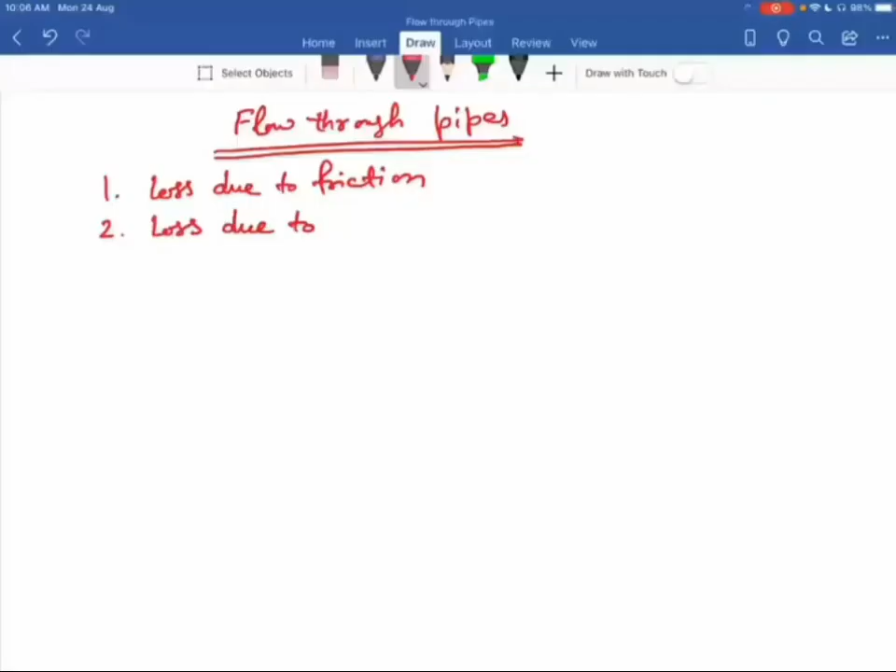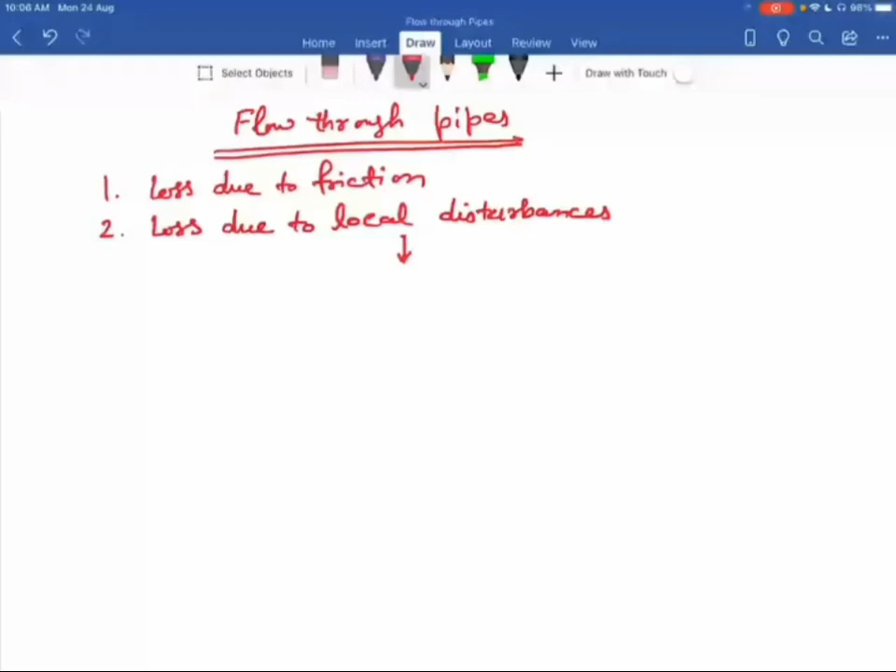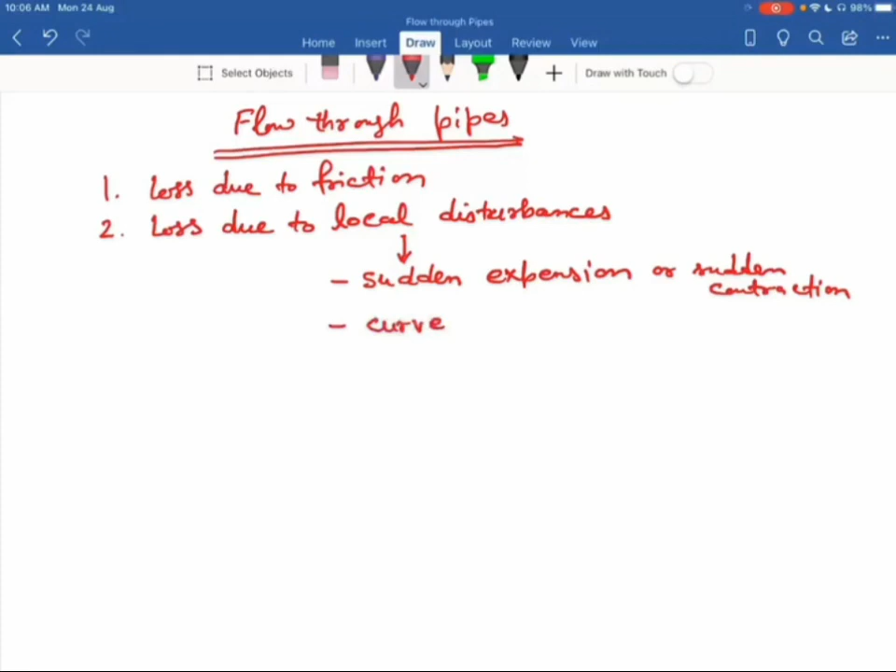When we experience various types of flow through pipes, we see various losses. Those losses are, number one, loss due to friction, and second, loss due to local disturbances. This loss due to local disturbances may be due to sudden expansion, or sudden contraction in the pipe. It may be due to some curve or bend in the pipe, or due to entrance and exit in the pipe.

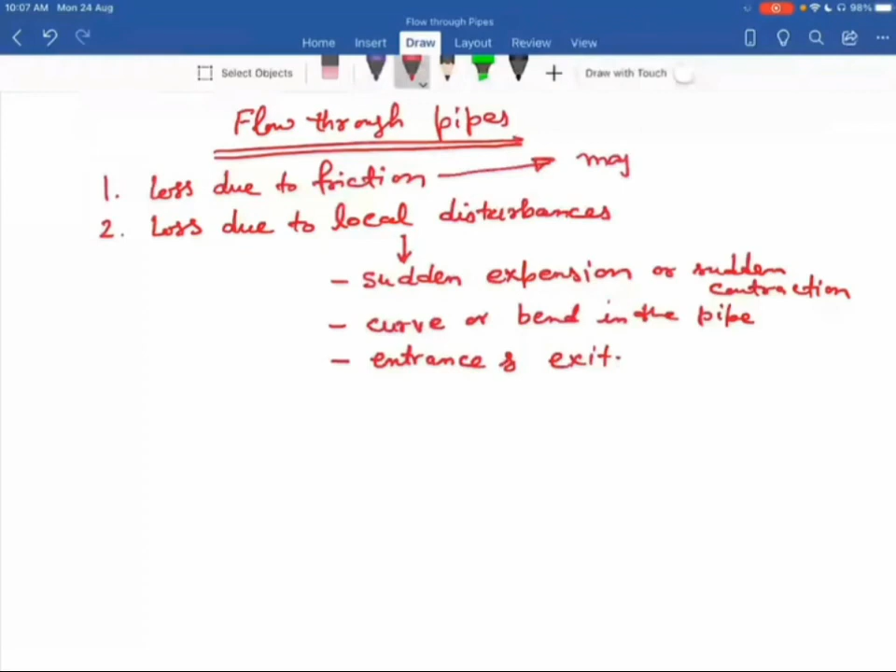Now the loss due to friction we call the major loss or major pipe loss, and the losses due to these local disturbances we call minor pipe loss. All these losses we measure in terms of pressure drop when some fluid is flowing from one section to another.

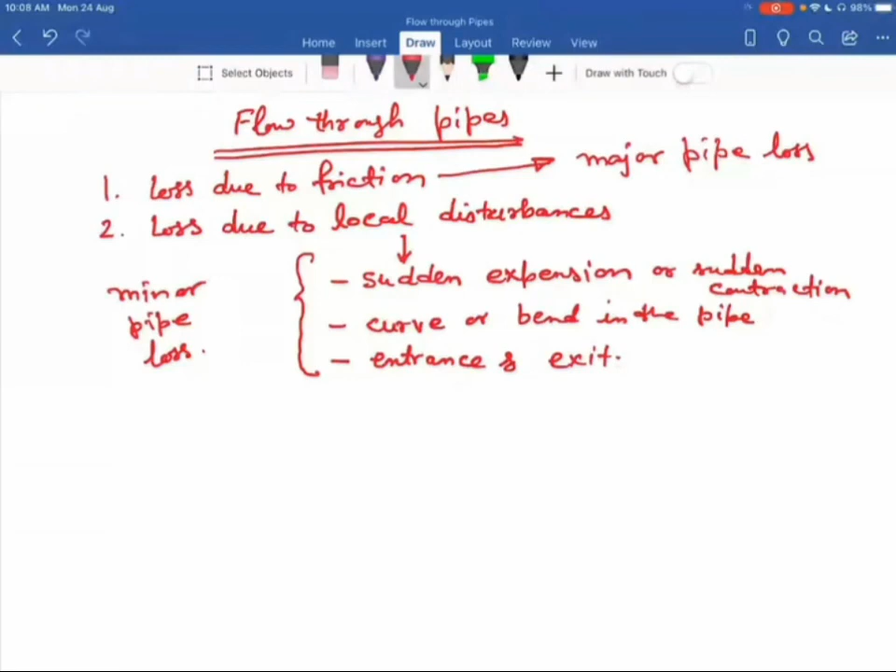Now say we have this pipe, and this is the direction of flow. This is our section 1, this is our section 2. When fluid flows from section 1 to section 2, there is some pressure drop due to friction in the pipe, and that pressure drop we call the losses. If this pressure drop is due to friction, we call it major pipe loss, and if due to sudden contraction, sudden expansion, curve, bend, entrance and exit, we call it minor pipe loss.

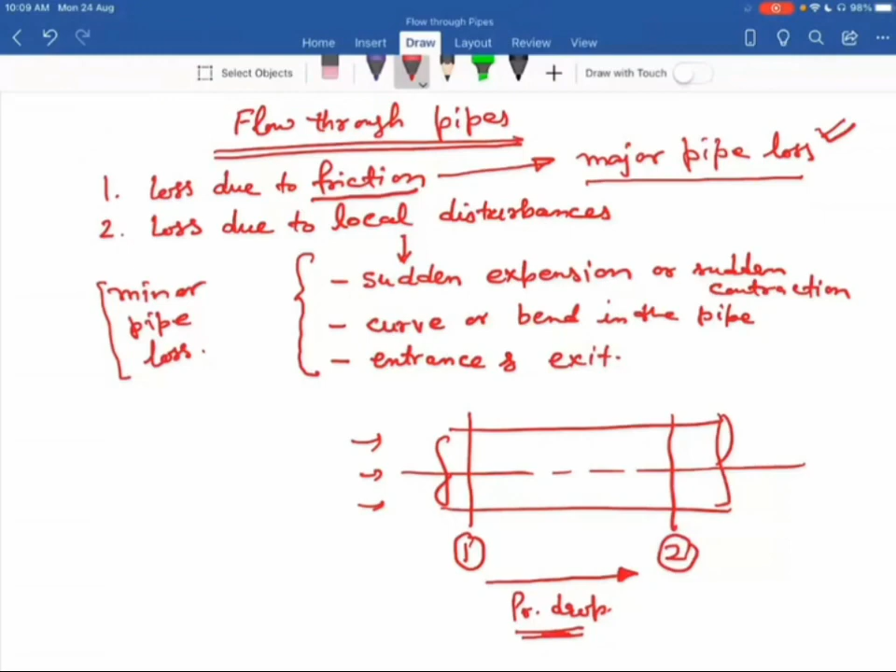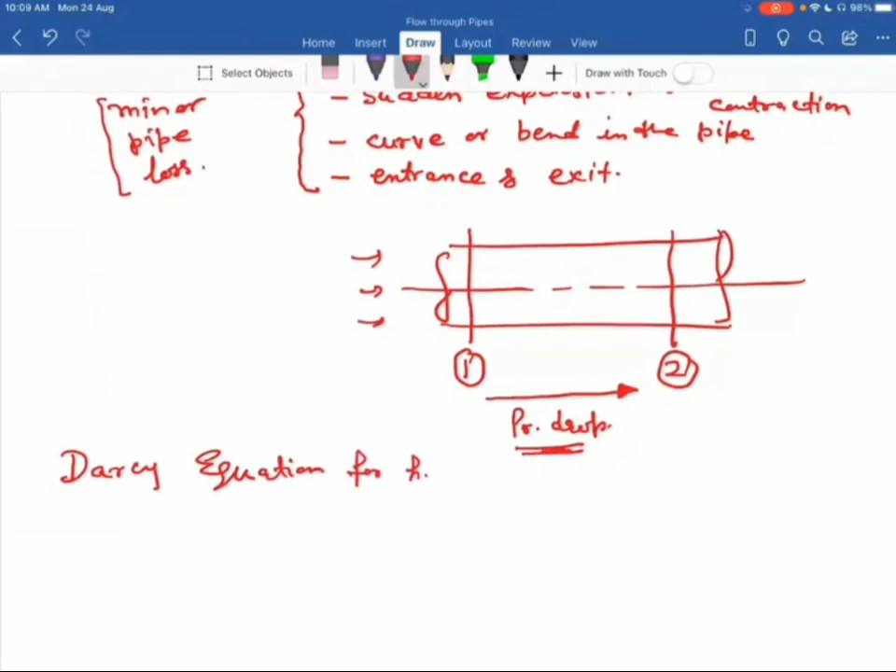So now we have to see the various formulas for these losses. First we see the formula for measuring the major pipe loss, that is the loss due to friction. The first formula for measuring the major loss is the Darcy equation, that is the Darcy equation for measuring head loss due to friction.

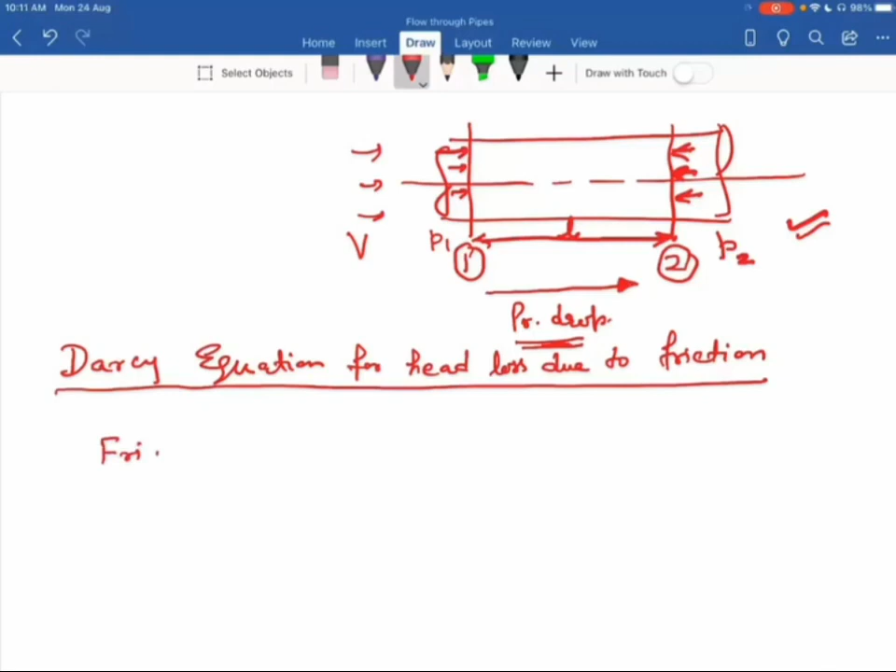For writing this equation, again we consider this pipe. Say in this pipe a uniform flow of fluid is flowing with velocity capital V. We consider two sections, section 1 and section 2, and the length between these two sections is L. The pressure intensity at section 1 is P1, at section 2 it is P2. The change from P1 to P2 is due to friction. When this liquid flows from section 1 to 2, the fluid experiences a frictional resistance force.

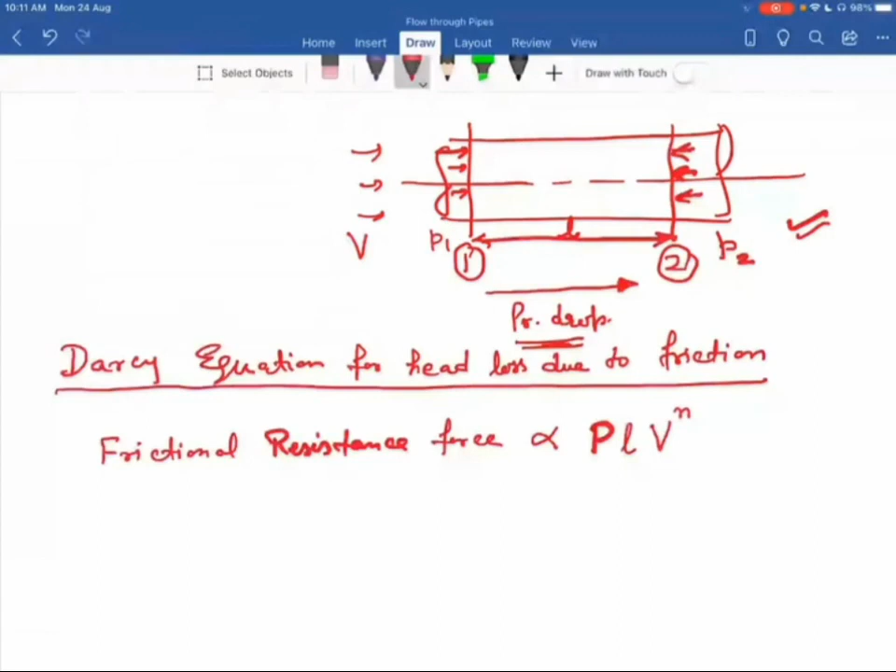On the basis of experiment, we see that this force is proportional to capital P, proportional to L, and proportional to V raised to the power N. Here P is the wetted perimeter of the pipe, meaning the perimeter of the pipe which is in contact with the liquid or fluid. L is the length of the pipe, and V is the average velocity of flow, that is the uniform velocity across the section.

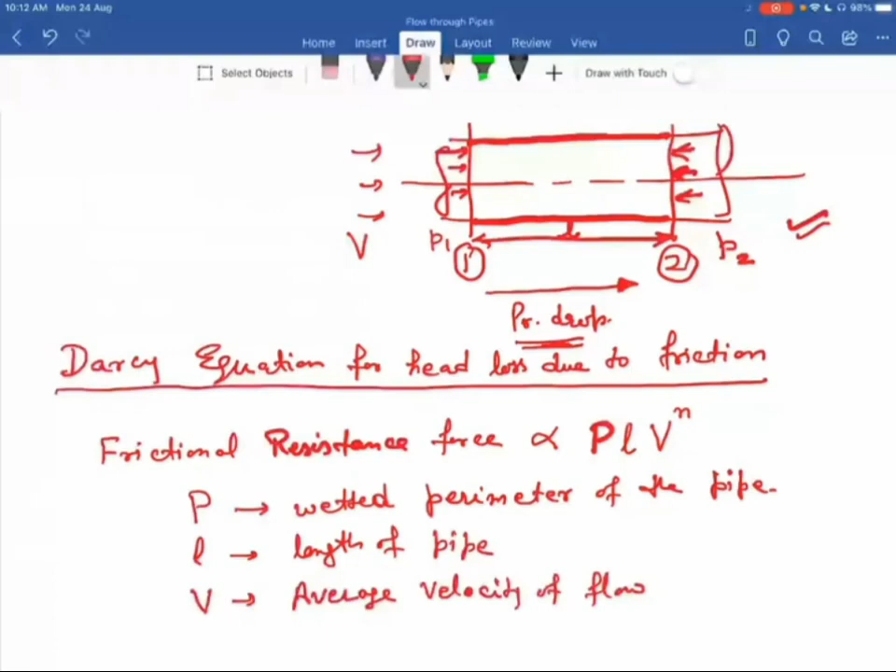And N is an index having some numeric value. The value of N depends on the material of the pipe, on the nature of the pipe surface. Nature of pipe surface means the roughness of the pipe; the pipe may be smooth or rougher. Depending upon that, we have the value of N.

Pipes which are available in the market we call commercial pipes. In practical cases, when liquid flows through those pipes, we consider the flow to be turbulent. So for commercial pipes with turbulent flow, the value of N is approximately 2. All the pipes available in our market, when used practically, have turbulent flow, so the value of N is approximately 2.

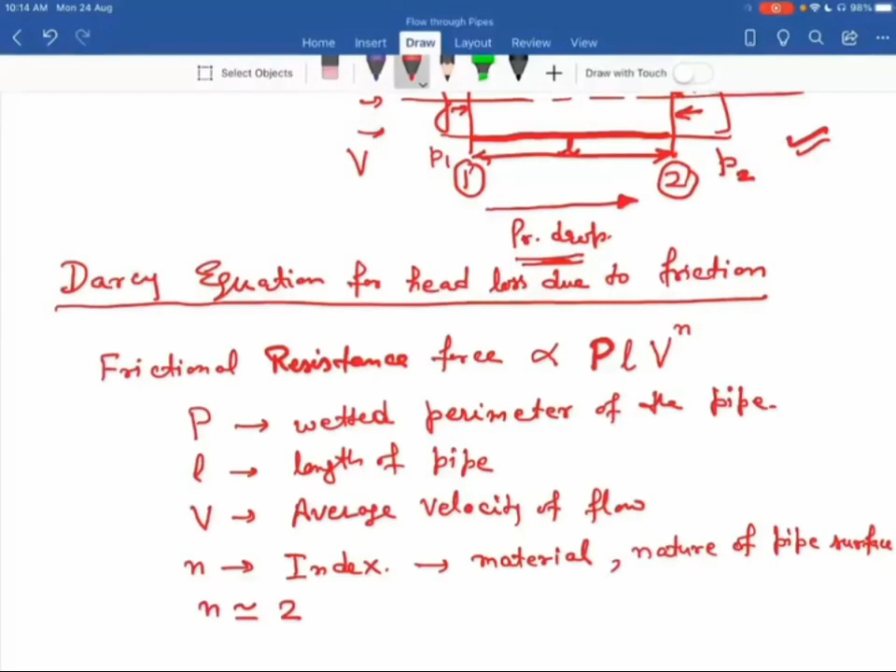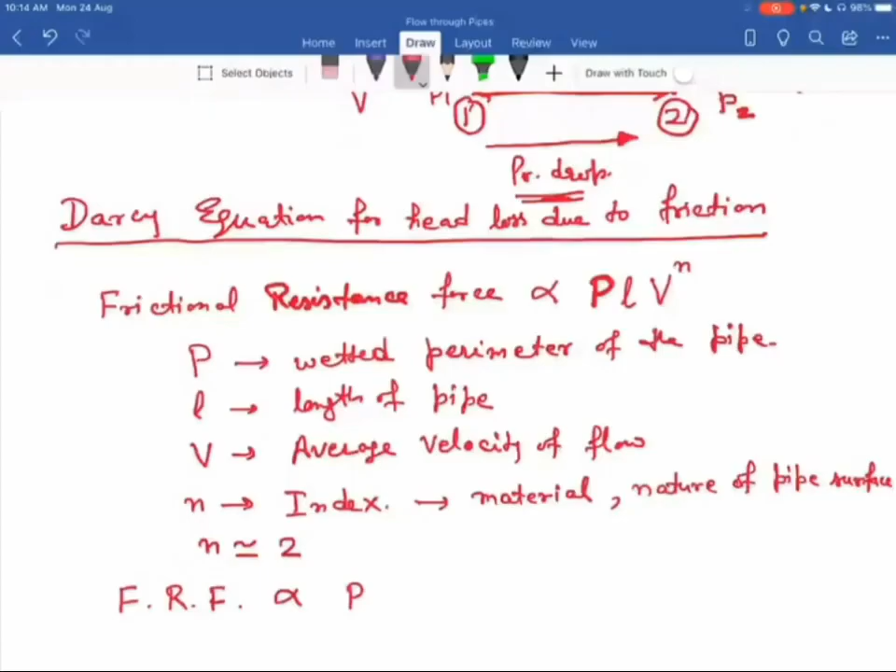Therefore we can write the frictional resistance force as proportional to P L V squared for commercial pipes. If we replace the proportionality sign with an equality sign, we add a constant of proportionality, so it is F dash P L V squared. F dash is a constant whose value depends upon the density of pipe material and the nature of the pipe surface. This is our equation number 1, which gives us the frictional resistance force. Now, if we see this pipe again, from section 1 to section 2 there is a drop in pressure from P1 to P2.

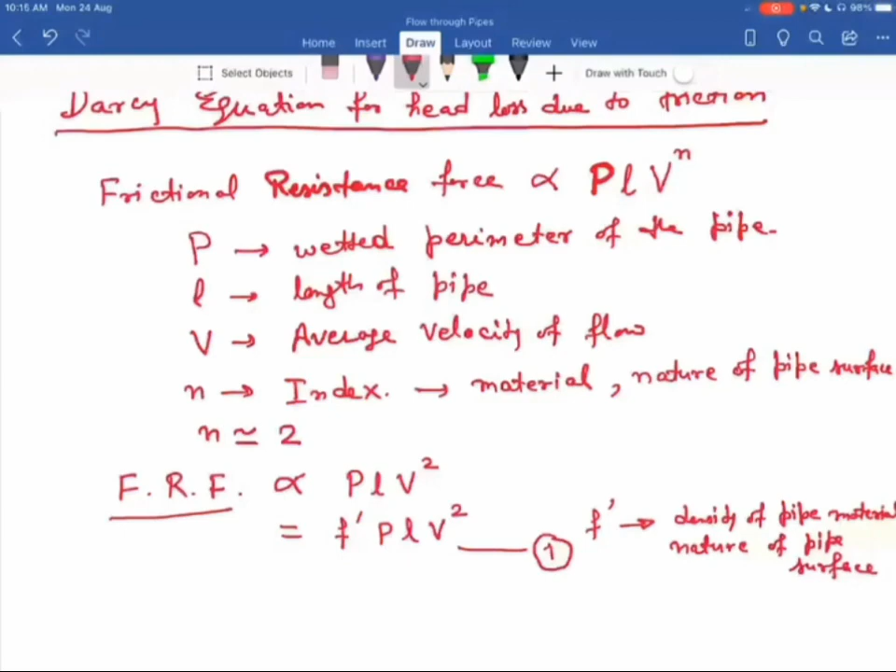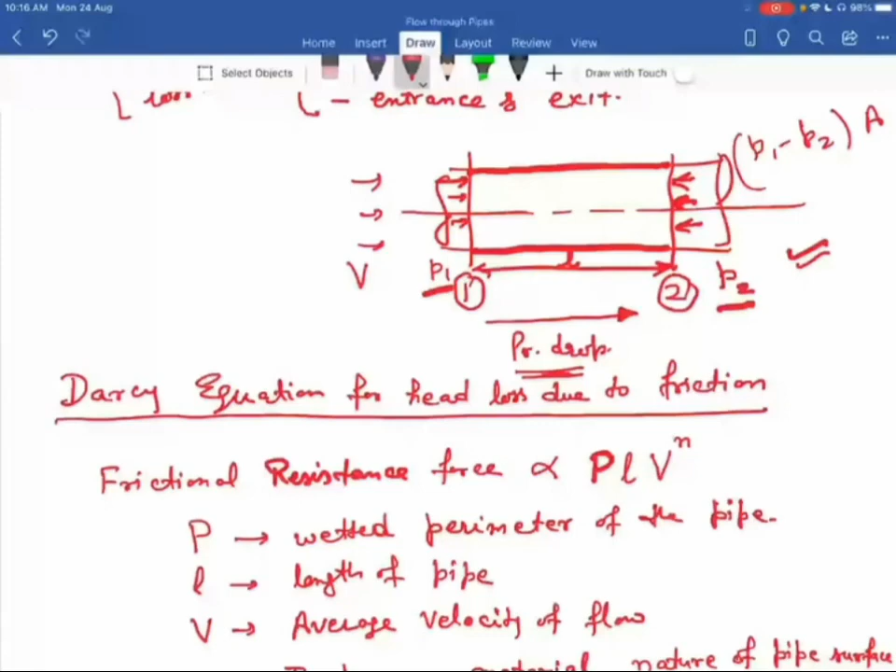Okay. Now, if I write this pressure drop, that's P1 minus P2, in terms of force, I have to multiply this by area. So the net force due to this pressure drop from section 1 to section 2 we can write as P1 minus P2 into the area of the pipe. So under equilibrium condition, this is our equation number 2.

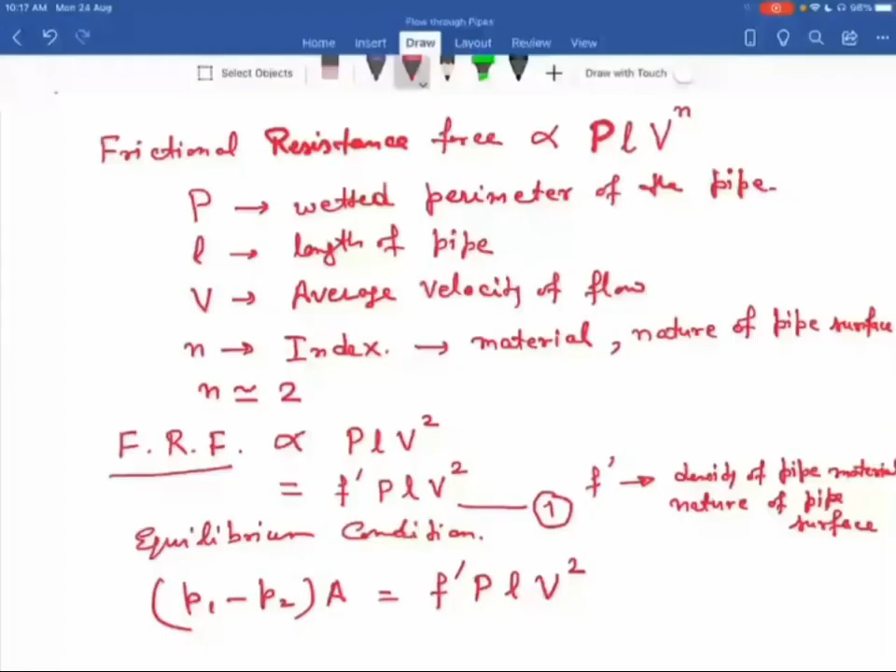Under equilibrium condition, we can write P1 minus P2 into A should be equal to F dash PL V square. Now we divide both sides by specific weight of liquid, small w. Then take A on the other side, divide by A.

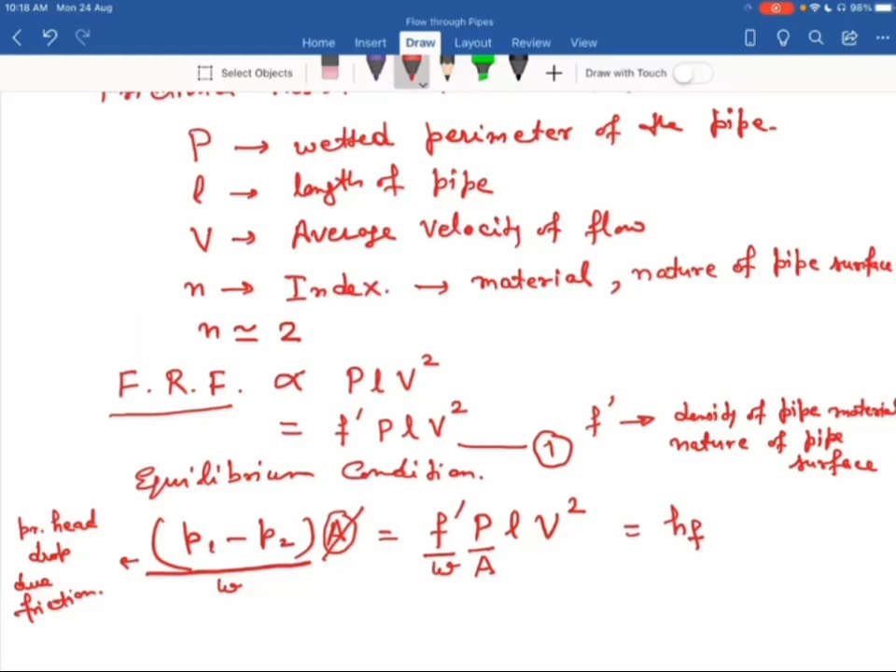Now on the left hand side, we have P1 minus P2 by W, which is the pressure head drop due to friction from section 1 to section 2. We can write this as HF. So HF is pressure head drop due to friction, equal to F dash by W into P by A.

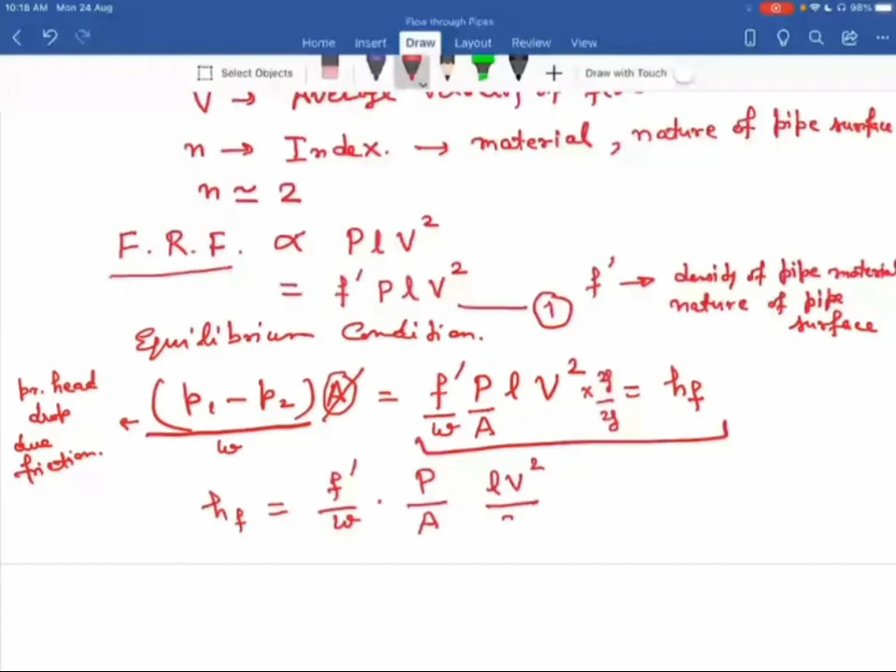Now I do one more thing. I multiply this term by 2G and divide by 2G, so I write it as LV square divided by 2G. Now further, we have one ratio A to P. Capital A is the cross-sectional area of the pipe, and capital P is the wetted perimeter of the pipe. This ratio I denote by Ym, and I call it hydraulic mean depth.

Now I rearrange the terms: HF equals 2G F dash by W into L upon Ym into V square divided by 2G. HF is the head loss, so its unit is meter. Similarly on this side, V square by 2G is again in meter. So this is one constant, and the remaining term has unit meter, same as that of HF.

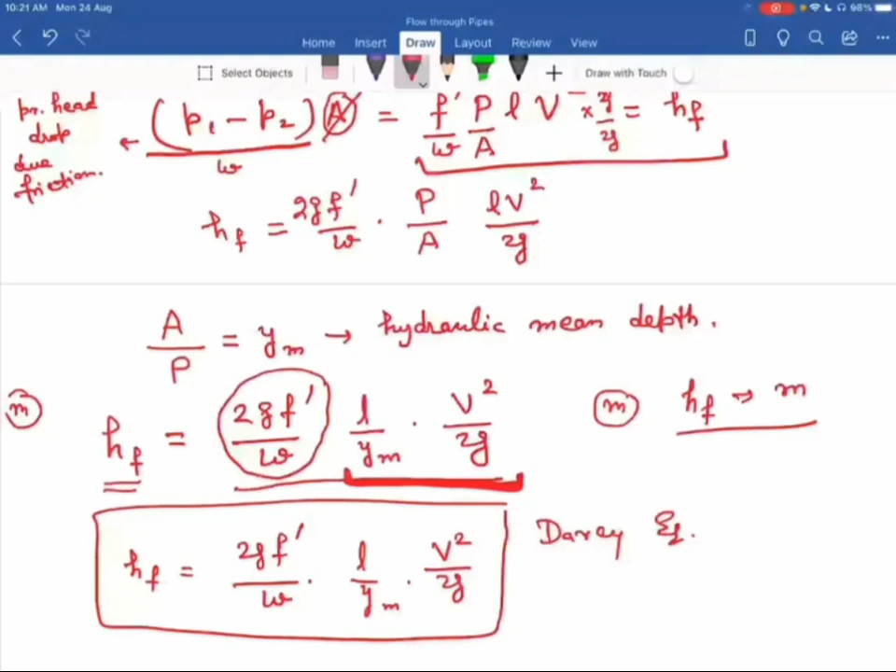So now we have HF equal to 2G F dash by W into L upon Ym into V square upon 2G. We call this Darcy's equation, used for determining the head loss due to friction. Now take the special case of a circular pipe. The perimeter is 2 pi r, or pi d. So hydraulic mean depth A upon P is pi by 4 d square divided by pi d, which comes out to be d by 4.

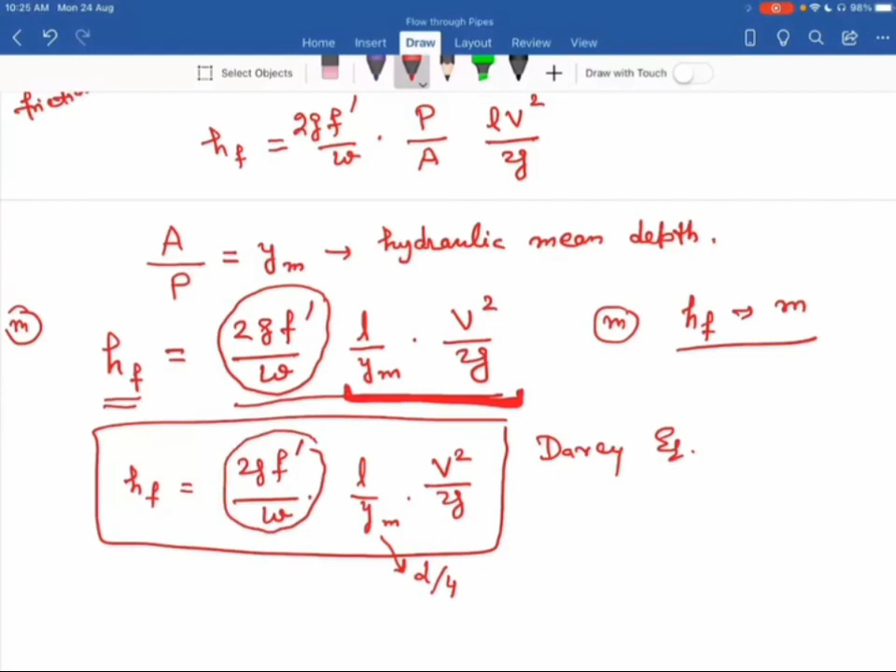So in Darcy's equation, use Ym as d by 4, and this total constant I write as F. So HF becomes 4FL V square divided by 2GD.

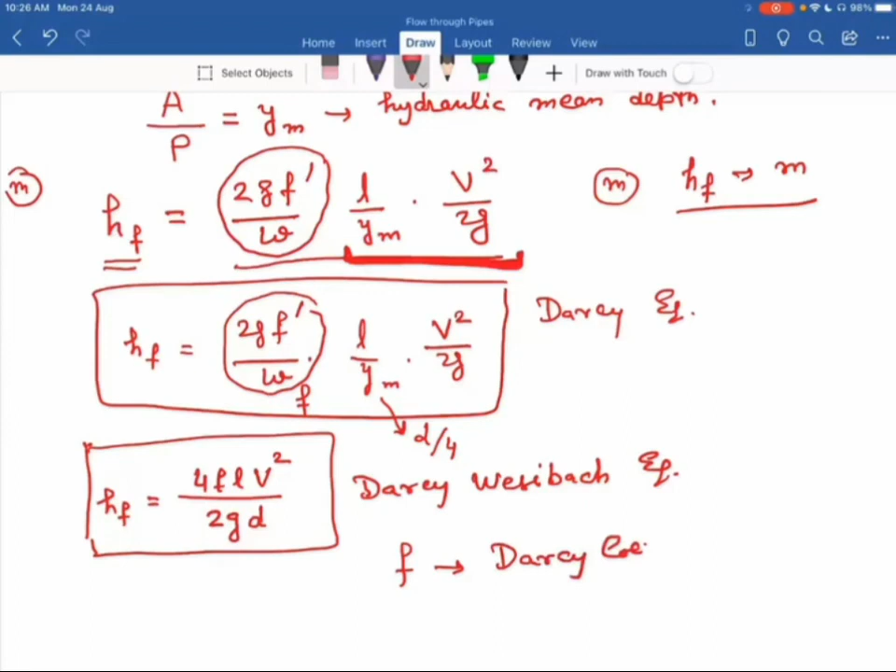This is called the Darcy-Weisbach equation: HF equals 4FL V square divided by 2GD. In this equation, F is called the Darcy coefficient of friction, and the combined term 4F is called the friction factor.

You have to keep this in mind when solving numericals. Either the Darcy coefficient of friction or the friction factor is given. When friction factor is given, that is 4F; when Darcy coefficient of friction is given, that is simply F.

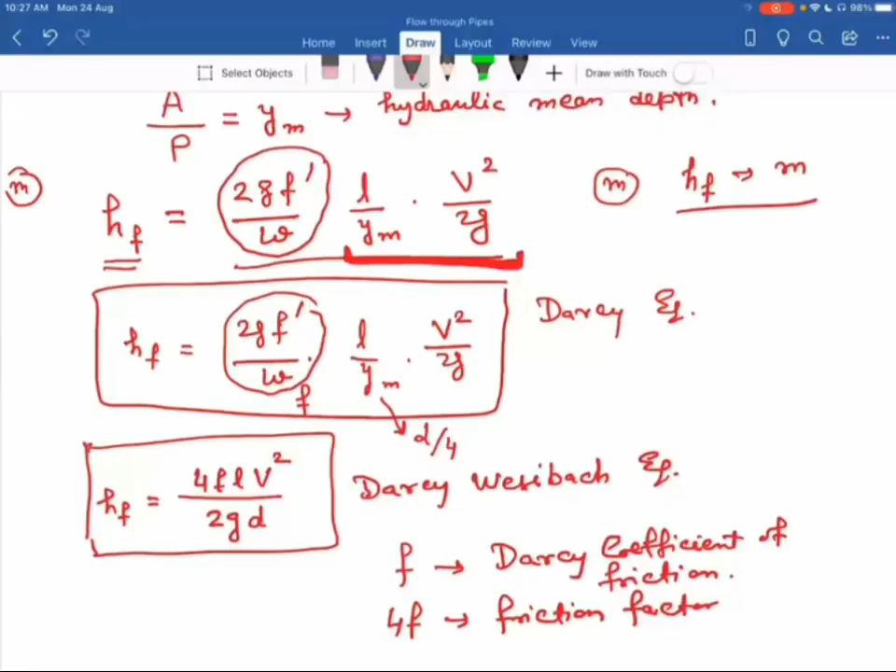Now the discharge Q we can write as A into V. For a circular pipe, that is pi by 4 d square into V. From here, V square comes out to be 16 Q square divided by pi square d raised to power 4. Replace V square in this term by this.

Then HF is approximately equal to FLQ square divided by 3 d raised to power 5. Whatever constant value comes is approximately 1 by 3. So in terms of discharge, you can use this formula. If velocity is given, you can also use the other formula.

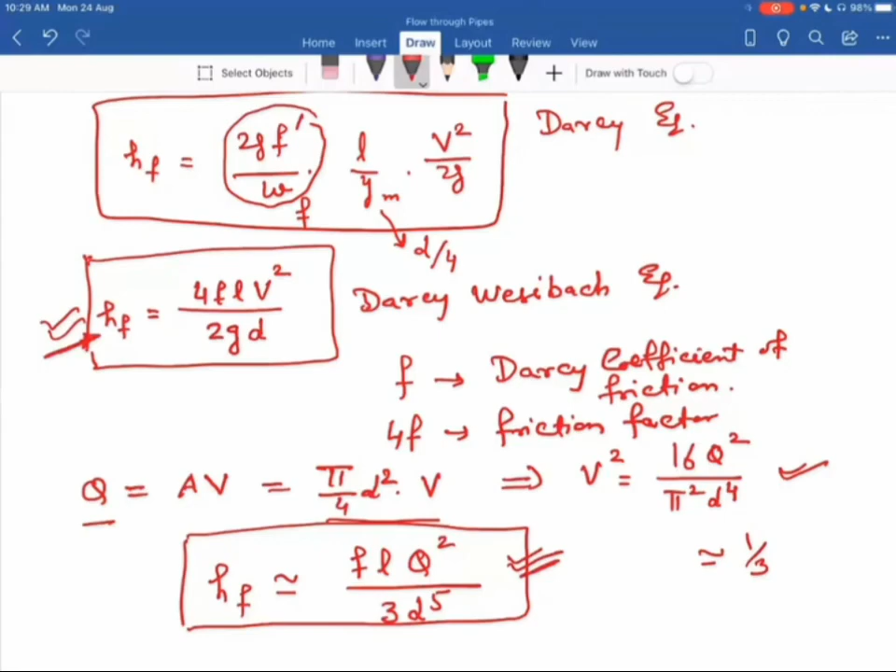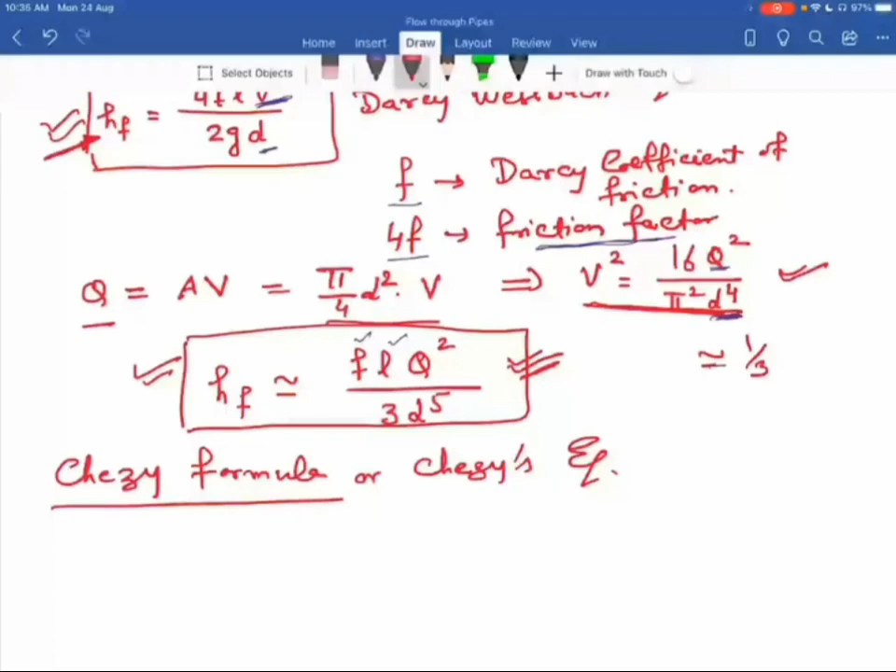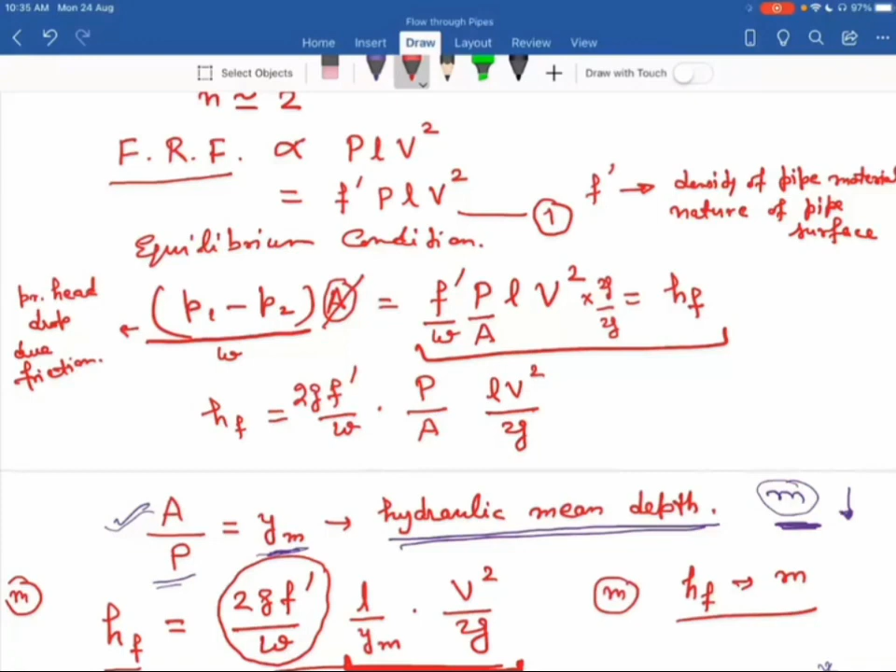So I have one more formula for determining the frictional loss that I call Chezy's formula or Chezy's equation. This we can also use to determine the frictional loss. For its derivation I start from this equation where I equate 1 with 2. So equation 1, f' P L V square, this one. And equation 2 is P1 minus P2 into A.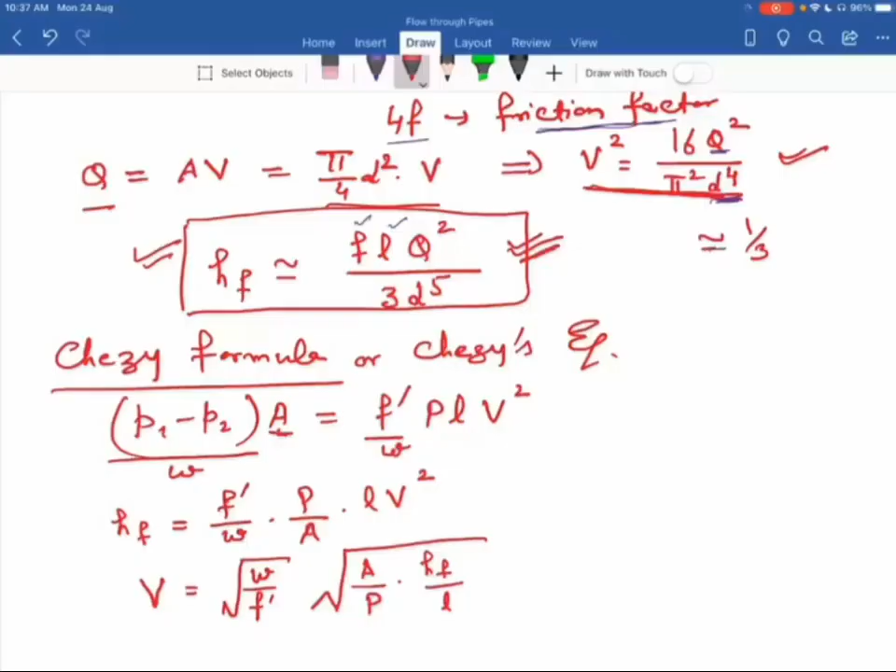So I write it again: P1 minus P2 into A equal to f' P L V square. Again I divide both sides by W. So I write hf equal to f' by W into, now take A on the other side, P by A into L V square. So from this equation I write V. This V comes out to be under root W by f', then A by P into hf divided by L under root. So I rearrange the terms and find out the value of V.

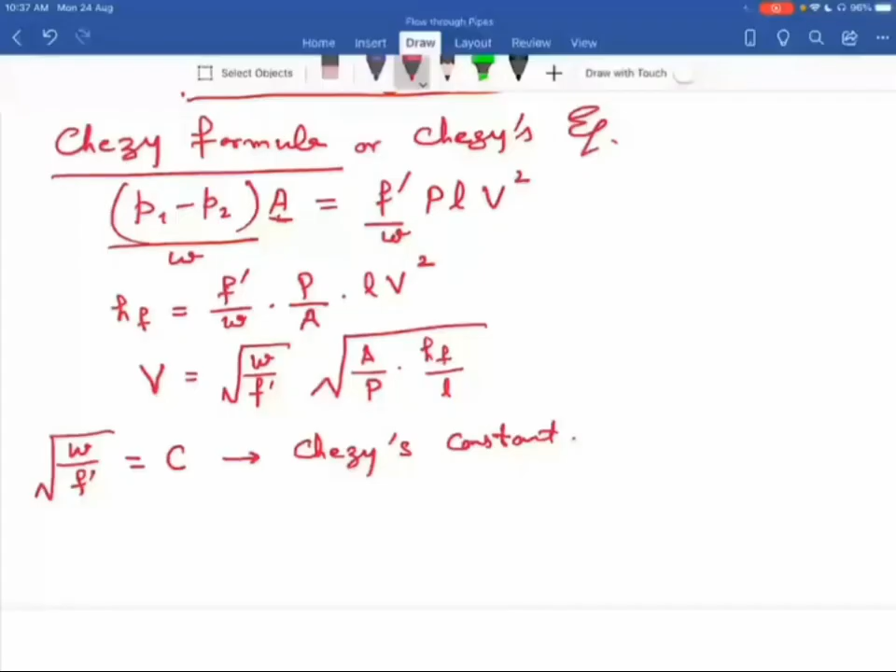Now, in this relation, W divided by f', this constant under root, I write it as capital C, and this is called Chezy's constant. A upon P, that is m, hydraulic mean depth. And then hf divided by L is head loss due to friction per unit length, so I denote it by i. So now the formula is V equal to C under root of m into i. This equation we call Chezy's equation.

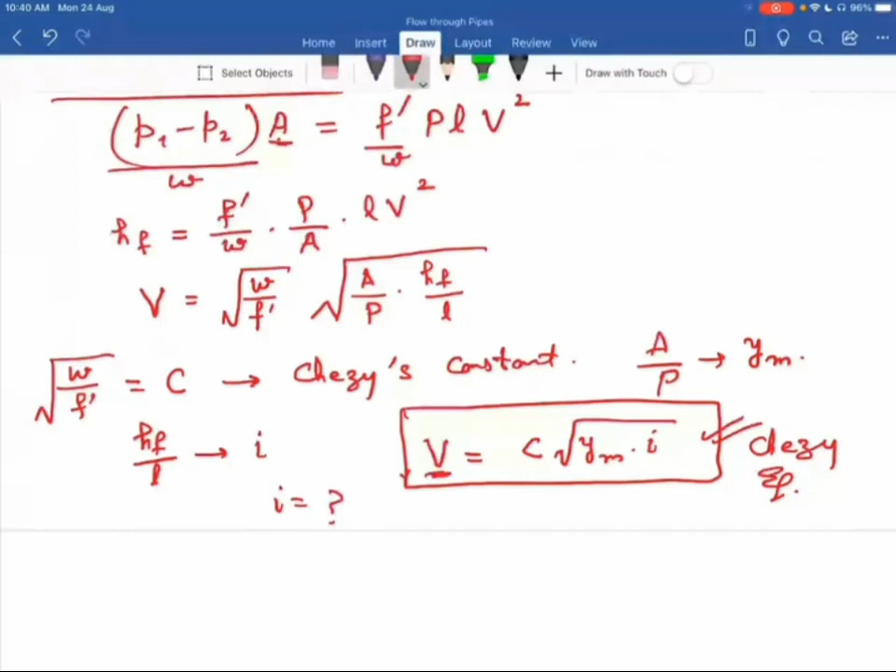So with the help of this equation, if you know the average velocity V by any means, and you have the cross section of the pipe, you can determine the value of i. With the help of this relation, you can also determine head loss due to friction, that is i. So this formula we write as V equal to C under root of m into i. This is the second formula for determining the major loss, that is head loss due to friction.

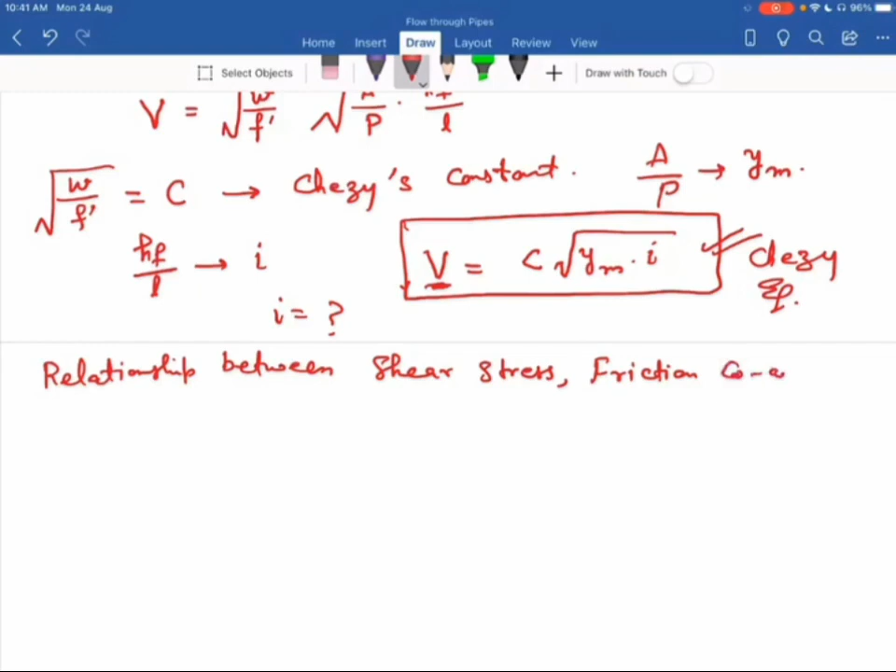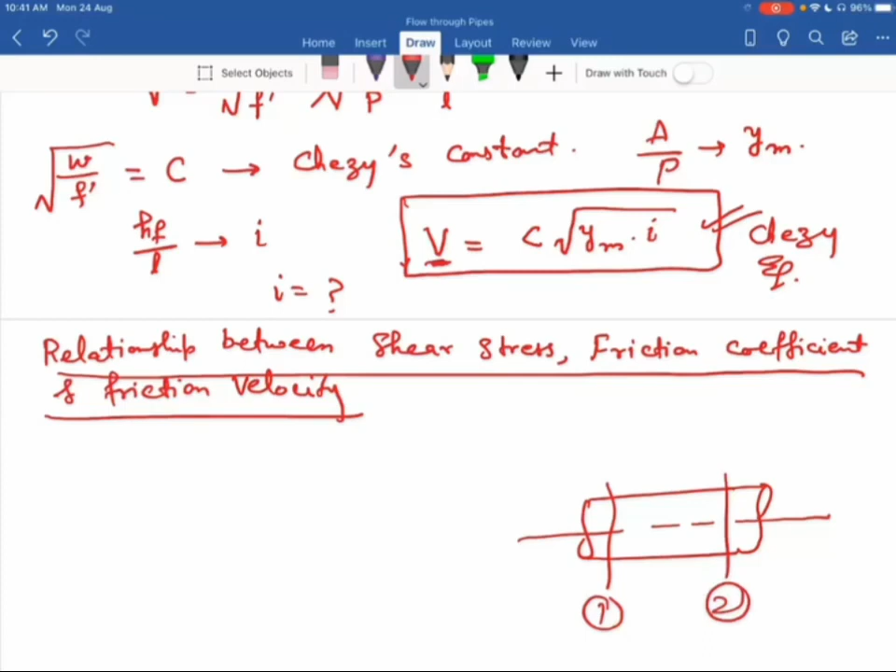Now I am going to write one more relation, that is the relationship between shear stress, friction coefficient, and friction velocity. Say I have a circular pipe. We consider two sections, section 1 and section 2. This is the direction of flow. At section 1, pressure intensity P1, here pressure intensity P2. Let capital R be the radius of this pipe, and the length between two sections is L.

Now the pressure force acting on this element between 1 and 2 we can write as P1 minus P2 into area, which is pi R square. This is equal to the resistance. Let tau0 be the shear stress, so the frictional resistance force is tau0 into the surface area 2 pi R L. So P1 minus P2 into pi R square should be equal to tau0 into 2 pi R L. From here we find P1 minus P2 comes out to be 2 tau0 L divided by R.

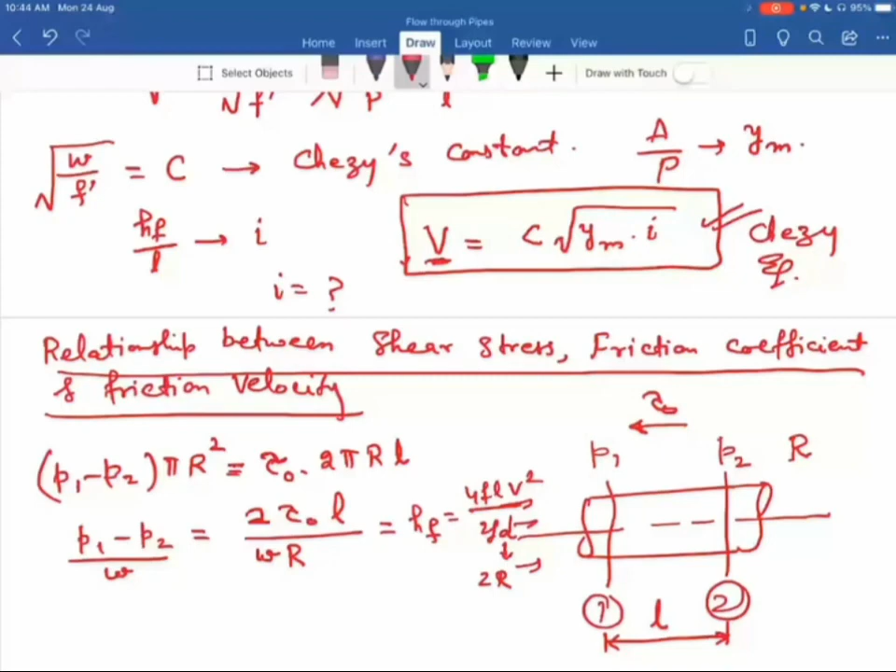Divide both sides by W. This is again the head loss from section 1 to section 2 due to resistance force, which exists due to friction, so we can write it as hf. Further, for a circular pipe, hf is equal to 4fLV square divided by 2gD, and D you can write as 2R. So now, 2 tau0 L divided by rho g into R, since W is the specific weight, should be equal to 4fLV square divided by 2g into 2R.

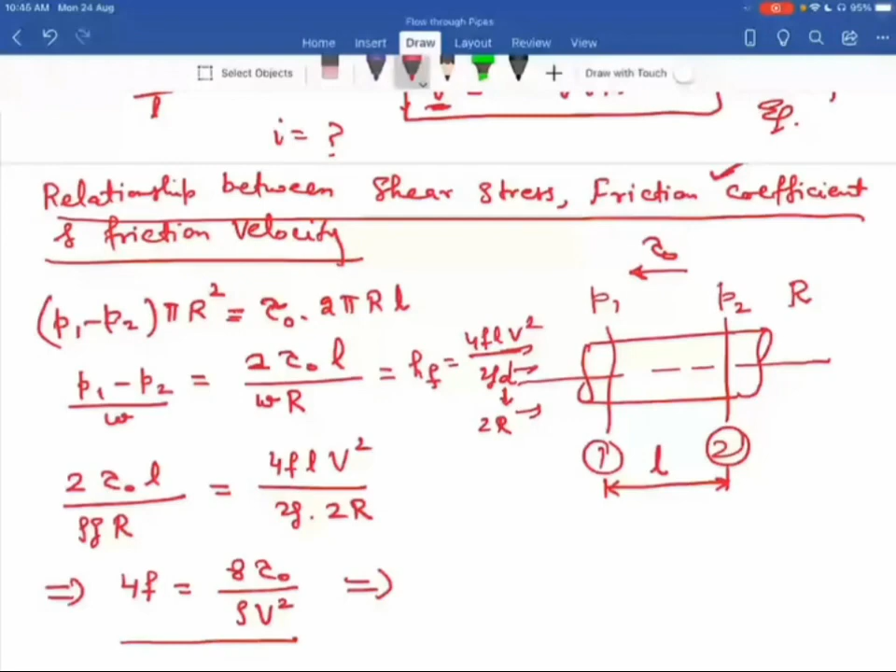So from here I can write the formula for 4f: 4f is equal to 8 tau0 divided by rho V square. This is the relationship between friction coefficient f and the shear stress tau. Further I can write from here the term under root tau0 by rho. This should be equal to V into under root 4f by 8.

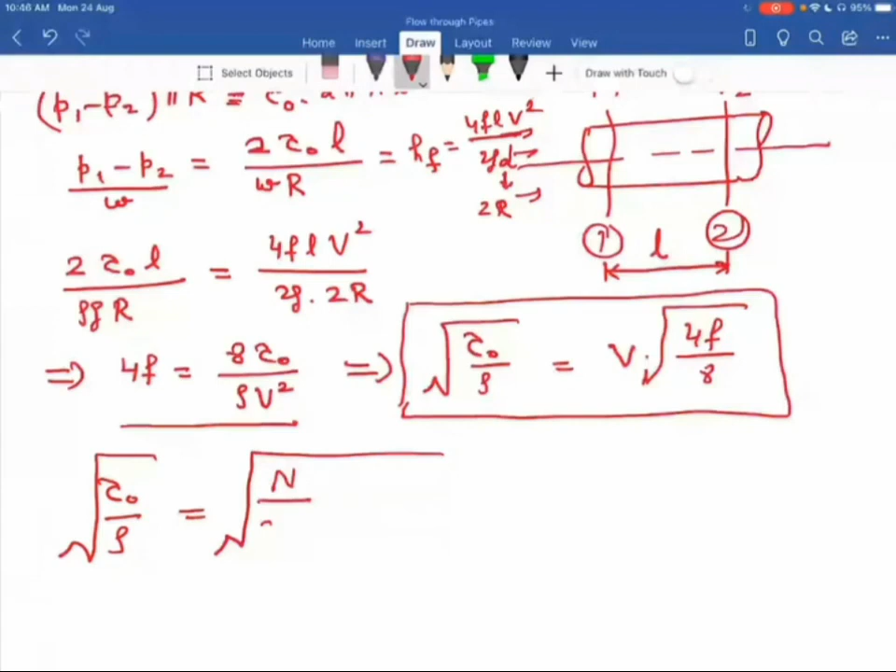I write it as 4f because 4f is the friction factor. So you have another relation, the relationship between tau0 and f. Now see the unit of this term, under root tau0 by rho. Tau is stress, newton per meter square. Rho is density, kg per meter cube. You can see the unit comes out to be meter per second, so this whole term has the unit of velocity.

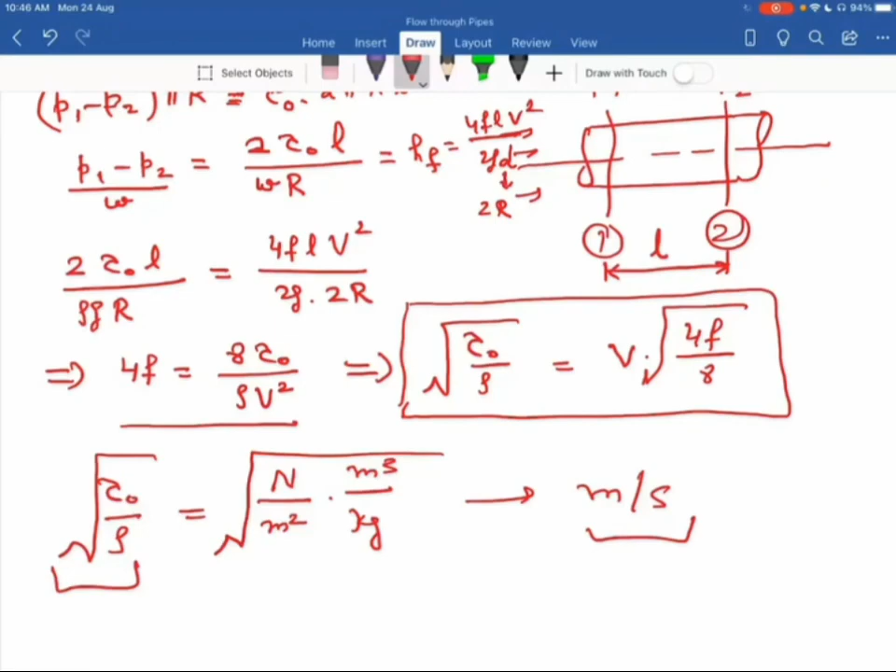So I call it friction velocity. This is also called friction shearing velocity, and denoted by U star. So you can write U star equal to V under root 4f by 8.